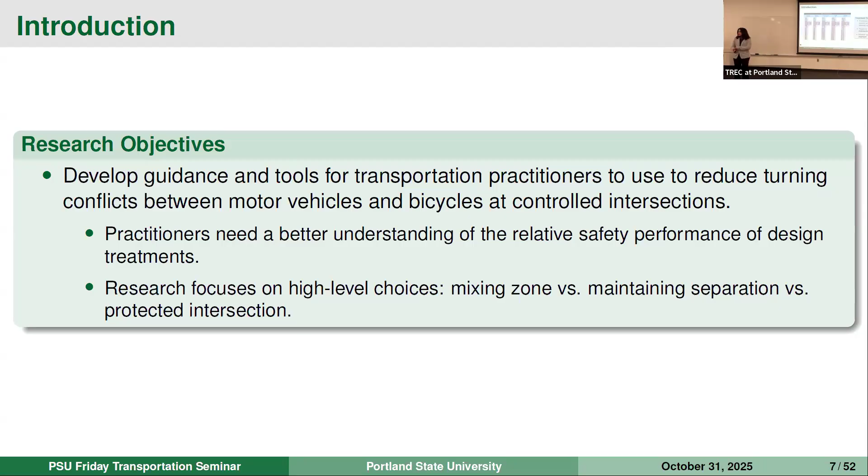The second treatment is the separated bike lane. The separation mainly occurs in the bikeway segment of the facility and may not always lead up to the intersection. The separation is generally through vertical elements like posts. Through the intersection itself, this treatment behaves very similar to the conventional bike lane, so the separation is mainly on the segment.

The third treatment type is the pocket keyhole bike lane. Here, bicyclists are shifted left—there's a lateral shift that takes place, and the bike lane is between the right turn lane for the motorist and the through lane for the motorist. The conflict area is upstream of the intersection, because this is where motorists are turning right to get into the right turn lane while bicyclists are shifting left to continue into the bike lane.

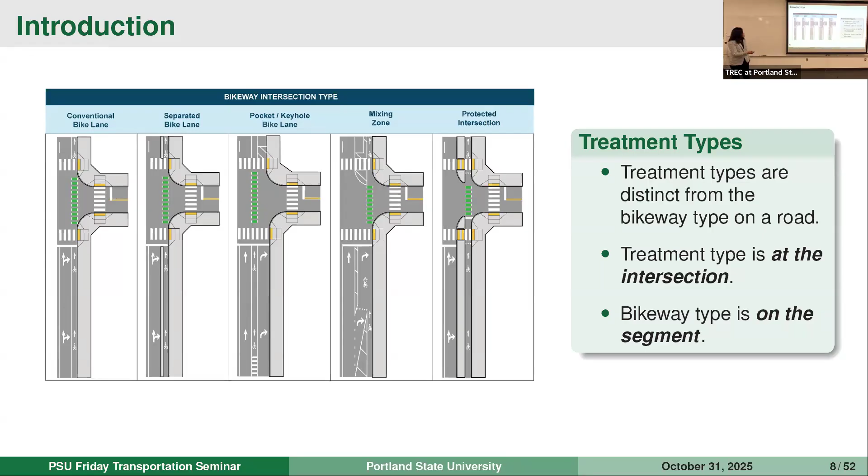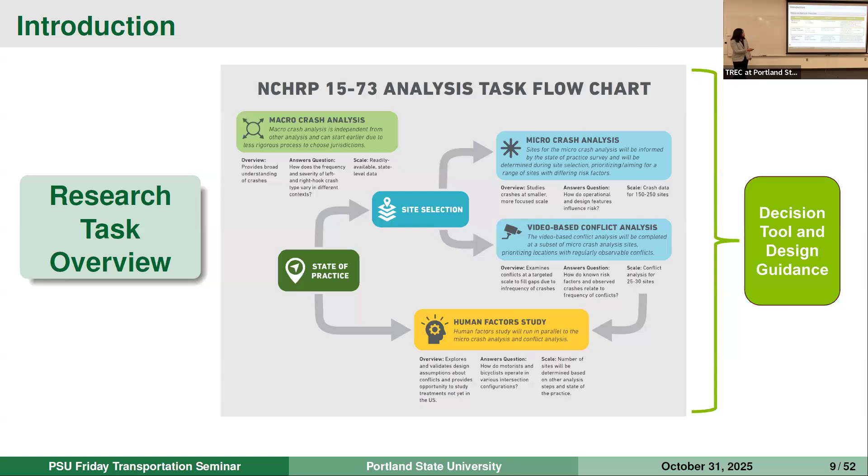Here's a quick overview of this mixed methods approach. This approach was undertaken because each of these experiments has some gaps, so by conducting these different experiments separately and then synthesizing the results together, we thought we could address those gaps with each of the methods.

As I mentioned, we first conducted a macro crash analysis, looking at crash data from the entire state. We looked at 3 states—Texas, Minnesota, and Washington—and then looked at aggregate bicycle safety, trying to understand the factors that affect safety.

From that, we were able to select some sites for the micro crash analysis. We ended up with 573 sites, all of which have the bike facilities of interest that I just talked about. We had 233 crashes that we evaluated at these locations.

The strength of the micro crash analysis, and crash analysis in general, is that it is a direct measure of safety. But the disadvantages are that it tends to be reactive, because crash data is available after a year or two, and we also have limited information about the crashes themselves, with variations in the crash reporting databases.

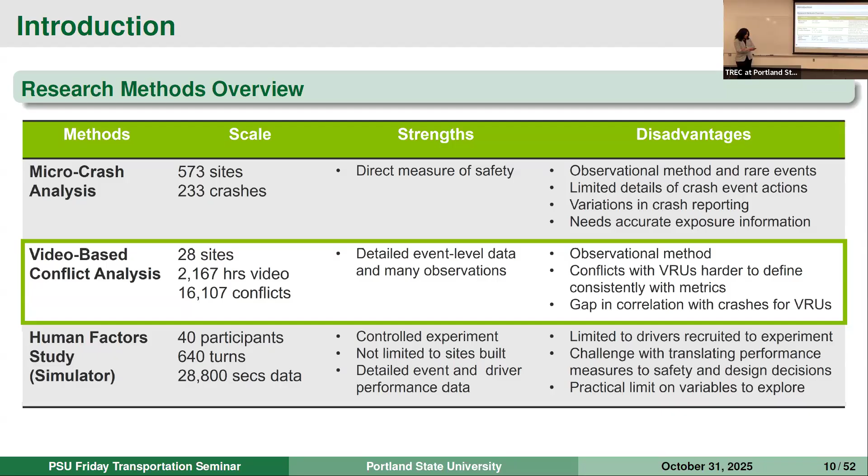Moving on to site selection, as I mentioned, we looked at the macro crash analysis and primarily looked at facilities with primary or secondary classifications, as defined in OpenStreetMaps. The macro crash analysis showed us there were a number of bicycle crashes also occurring at the intersection of these primary and secondary facilities with tertiary facilities—tertiary facilities being your local and collector streets.

So we added those back in and looked specifically at intersections to select locations with a bikeway or treatment of interest that was signalized. From that, we selected our micro crash analysis sites and also our sites for the video conflict analysis. In the interest of time today, we'll primarily focus on the video conflict analysis, which Jason will talk about in a few minutes.

For that, we wanted the sites to be as geographically dispersed as possible—we didn't want to just select sites from one city or area, since we want to understand how these treatments perform everywhere. We aimed to select 5 to 6 locations per treatment type, with a mix of traffic volumes and intensities. We also looked at feasible camera mounting locations to make sure sites had the necessary infrastructure, and that they had adequate bicycle volumes, since we're studying conflicts and need enough volume to study that.

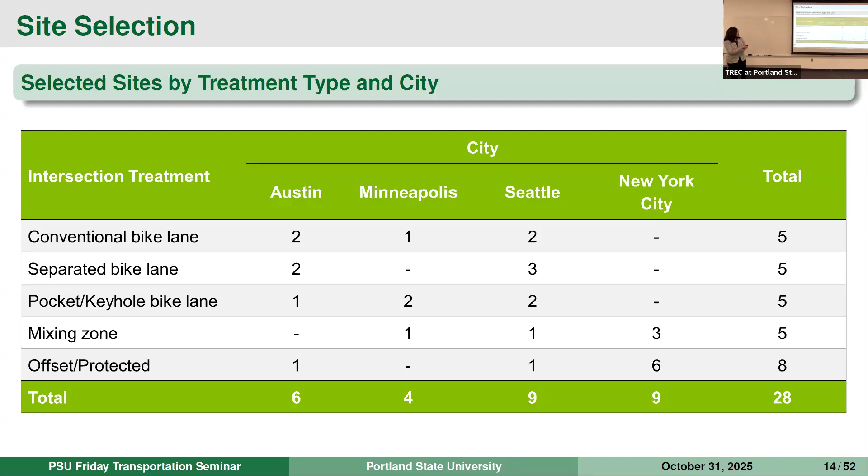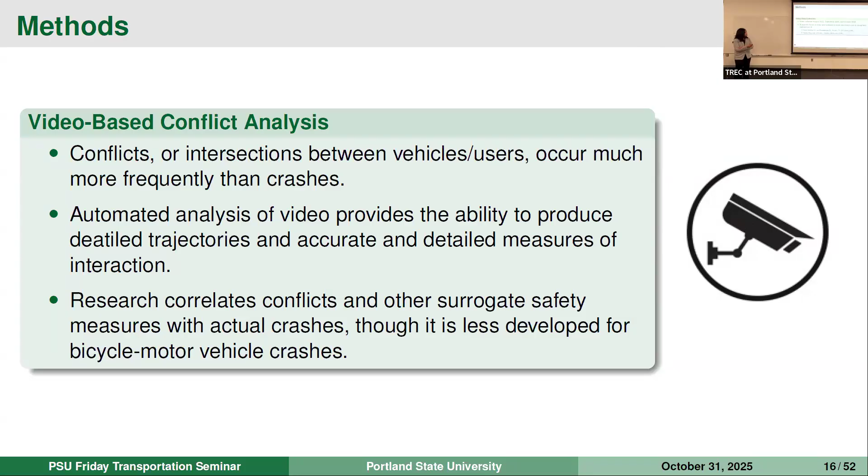A little bit about the methods—as I said, we'll focus on the video-based conflict analysis today. We contracted with a vendor to collect the video data, and then with another vendor to perform an automated analysis of it. This analysis gave us the ability to look at detailed trajectories and other information. The video data was collected over 3 months, between August and October of 2022.

We made an effort to collect at least 60 hours of data at each location. There were a couple of exceptions where we didn't quite meet that threshold, due to equipment malfunction.

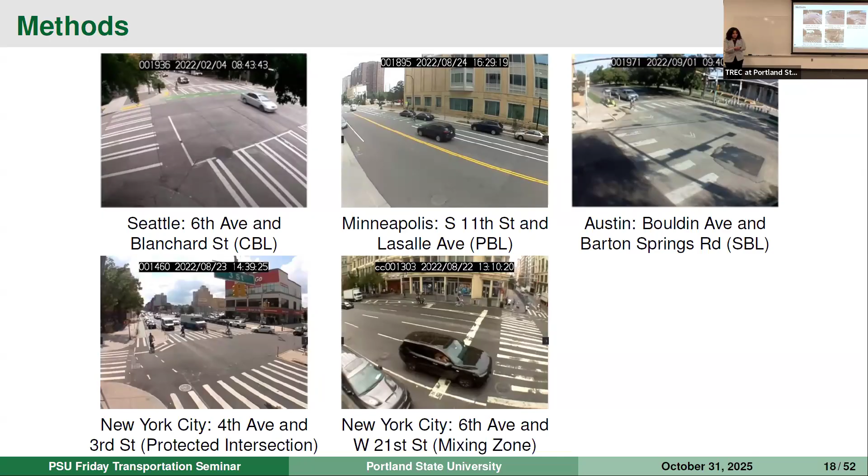Here is the information we got from the automated analysis. We were able to get trajectories for each road user that was extracted from the camera.

In addition to these trajectories, we also were able to know what type of road user was arriving at that conflict area. So we drew the conflict area we were interested in, which user arrived first. We also know what the median and conflict speed of the two users were, the type of conflict, and observed PET.

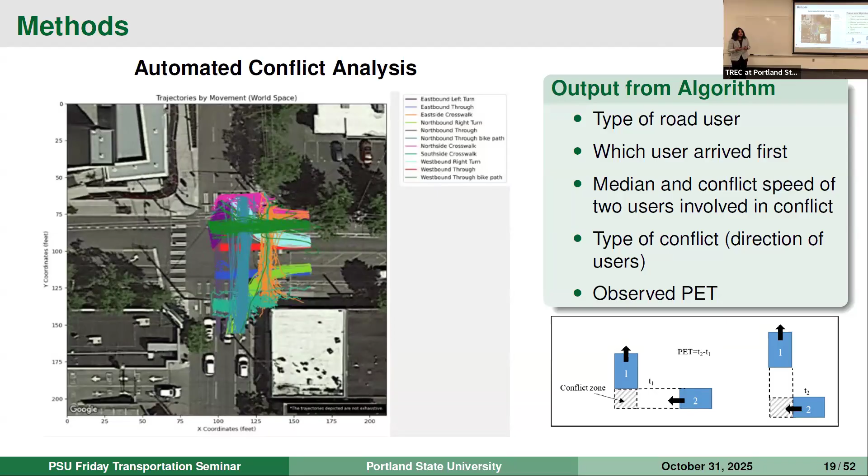PET stands for post-encroachment time. It is a surrogate safety measure that essentially refers to the time difference between when the first user leaves the conflict area and the second user enters that conflict area. So it's essentially telling you how close the two users are in time and space.

Okay, with that, I'm just going to pass it over to Jason to talk about the data and methods. Thanks, Sirisha. So the first thing we had to do when we received the data from the third-party vendor was some data massaging, data cleaning, and data preparation.

We originally got data that included all PETs less than 10 seconds. We filtered that to represent PET of less than or equal to 5 seconds. Sirisha mentioned there wasn't much consistency with certain thresholds. A recent study summarized about 12 different studies and established with some confidence that 5 seconds is a good threshold, representing some level of severity of conflict between motor vehicles and vulnerable road users.

After filtering, we looked at some different removals as well. Any violation, so if the facility wasn't being used correctly by the cyclist or motorist, any pedestrian-vehicle conflicts or unknown vulnerable road user conflicts were removed. Any bicycle-to-bicycle conflict was removed, and then any erroneous speed was removed as well.

We had a couple of speeds in there that were in the 180 to 190 mile per hour range for both the motor vehicle and the cyclist, completely unrealistic for these types of intersections. Lastly, we removed any duplicates. The number of duplicates is almost the exact same as the number of observations remaining for analysis. We suspect that when we extracted and downloaded the data, the observations were simply duplicated.

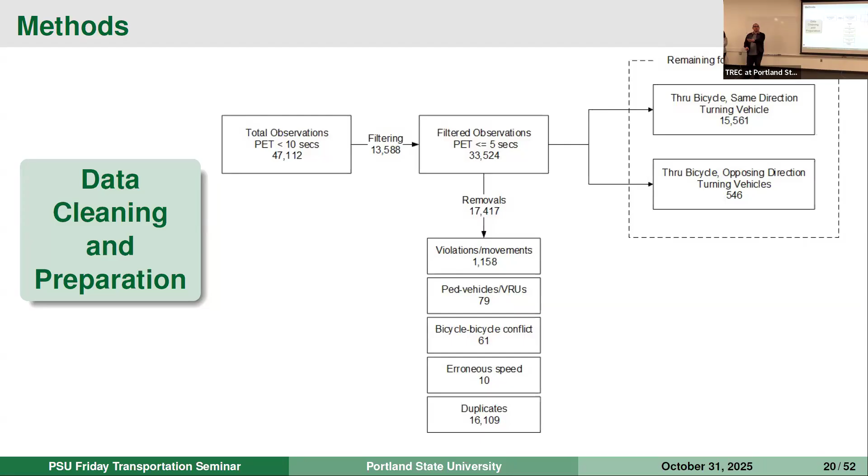In the end, that gave us about 15,600 observations representing through bicycle movements with vehicles turning in the same direction, those right hook movements. And then about 550 observations in which the bicycle was having a through movement and the vehicle was turning from the opposing direction, those left turn movements.

Next, we needed to define our conflict threshold and severity threshold. In general, lower PET values indicate a more severe conflict, meaning the interaction between cyclist and motor vehicle is closer. However, PET alone may not be sufficient to describe a conflict in full detail, so we can further inform that interaction by considering vehicle speed at the time of conflict, which fortunately was provided by the third-party vendor.

So we first defined our PET thresholds based on well-known and established values. Less than or equal to 1.5 seconds is a high severity conflict. 1.5 to 3.5 seconds is a medium severity conflict. And 3.5 to 5 seconds is a low severity conflict.

In addition, we empirically looked at what the speeds were at the time of conflict. We used median speed and compared that to other studies done across the country at different locations and facility types, like unsignalized intersections and mid-block crossings, to understand the speed threshold used. Pretty consistently it was in the 9 to 10 mile per hour range, which matched our empirical values as well.

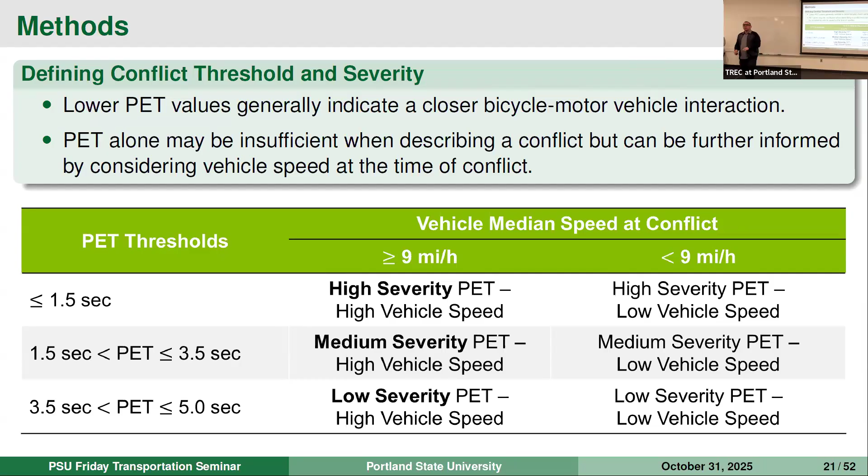So our speed threshold to determine high speed or low speed was 9 miles per hour. What we're going to focus on primarily today are the high severity conflicts associated with high vehicle speed at the point of conflict, particularly for the modeling, which we'll talk about a little bit later.

So for the results, I want to paint sort of a wide brush over the results, and then Sirisha will jump back in and conclude what the key findings are and how they can be used in the design tool.

So here is an overview of the total number of conflicts. Note that these are all conflicts less than 5 seconds, not high severity conflicts. I'm sure most of you are immediately noticing the very large values corresponding to New York City, particularly for our mixing zone and protected intersection treatment types.

This was something we had to deal with, and in the modeling we accounted for this through certain techniques. There's just an overrepresentation - there's more folks, more people, more bicycle volume. Overall, there's more conflicts in New York City.

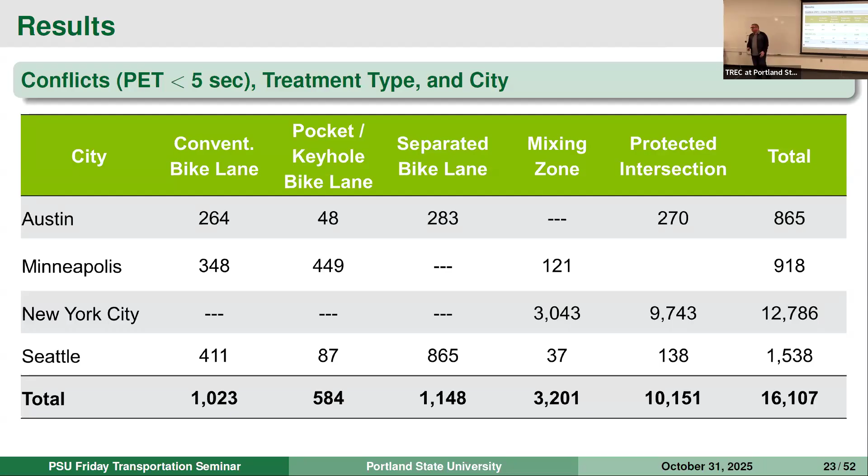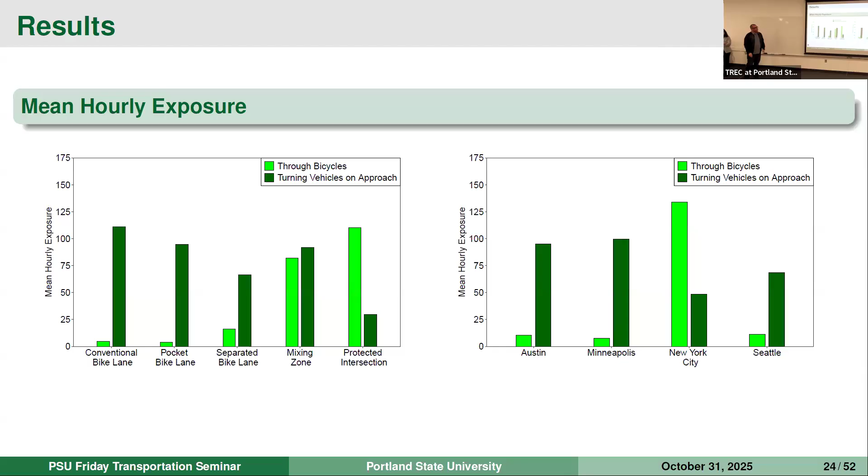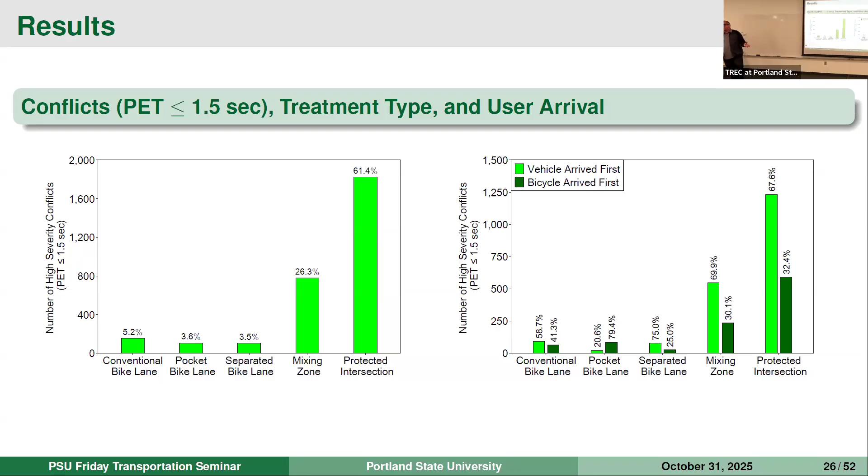What happens if we look now only at high severity conflicts, those PETs less than or equal to 1.5 seconds? We wouldn't expect much difference here, simply because of the overrepresentation of observations in New York City, hence mixing zone and protected intersections. But we do see different behavior in terms of vehicle versus bicycle arriving first - it's almost the opposite for the 3 treatment types that aren't mixing zone and protected intersections. Now the vehicle arrived first for a couple of those, and the split is much larger than what we looked at for all conflicts less than 5 seconds. This is true for all treatment types.

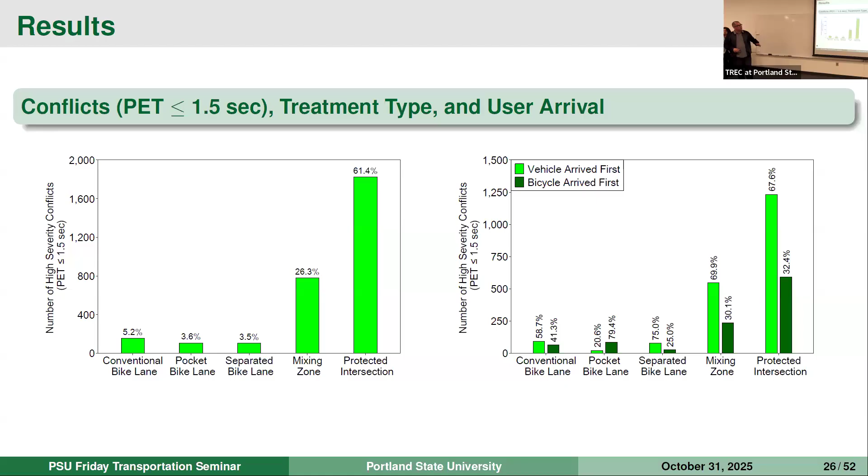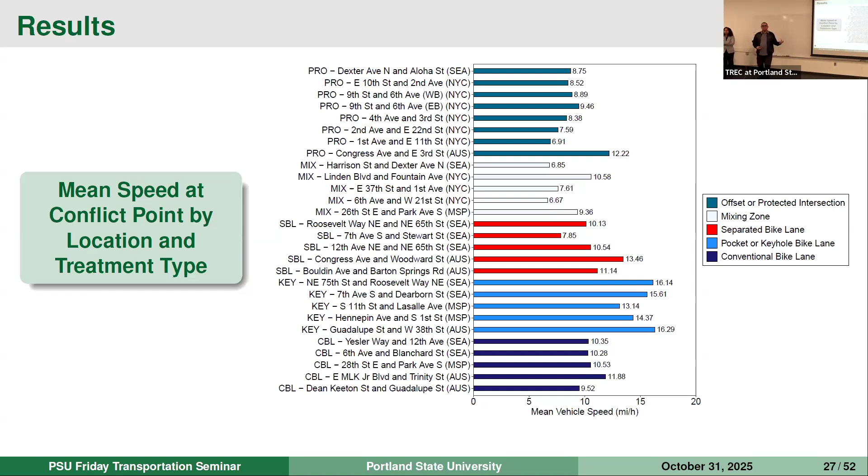Next, we assessed the mean speed at conflict point by location and treatment type. There's a lot going on here, so I want to point out 3 things. First, the pocket or keyhole bike lane - we denote 3 letters representing protected intersection, mixing zone, separated bike lane, and so forth. The keyhole or pocket bike lane has the highest mean speed across its locations at the point of conflict. If we go to protected intersection and mixing zones, with the exception of an outlier in Austin, these 2 treatment types have the lowest average speed at point of conflict. We're starting to see a trend in terms of which treatments may be preferred versus those with lower safety performance.

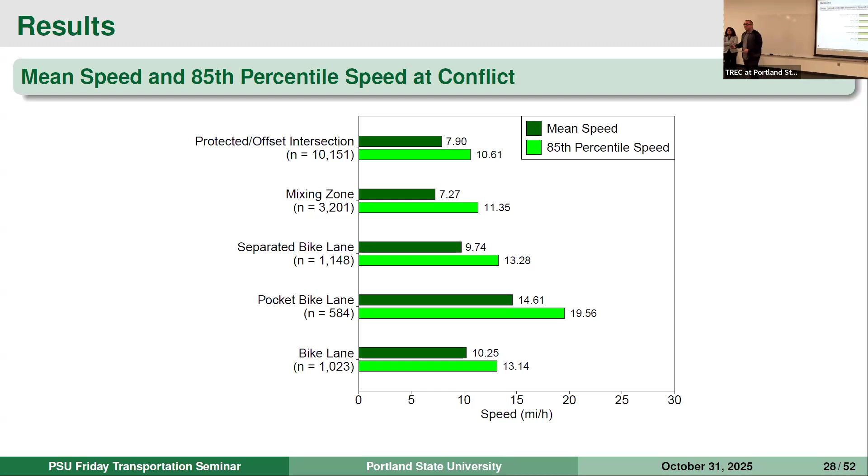We also looked at overall mean speed per treatment type, not at the site level, as well as 85th percentile speed at the point of conflict. Again, the same trends: the pocket bike lane has, by a decent amount, the highest average speed at the point of conflict, as well as the highest 85th percentile speed, while protected intersections and mixing zones have the lowest average speed and lowest 85th percentile speed at the point of conflict.

This plot I particularly like. It shows different severities of PET by the red circles, blue triangles, and green squares. What we would expect to see is this funneling effect - fewer high severity conflicts, more medium severity conflicts, and the most conflicts being low severity. That's the behavior we observe mostly across these treatment types. We can also see how many more observations we had for mixing zones and protected intersections due to those locations being in New York. This also shows how few observations, relative to other treatment types, we had for pocket bike lanes.

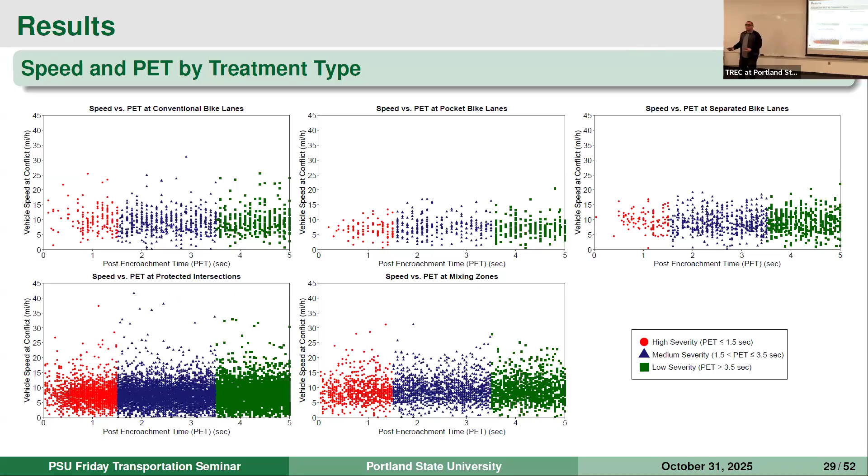This plot also presents some pretty good information that sticks right out at you in terms of the proportions. It's more viewable on the computer screen and less viewable on the overhead projector, so apologies for that. But what we see here are these large proportions of high severity.

This is now including speed, so PET less than 1.5 seconds and vehicle speed at the point of conflict greater than 9 miles per hour. We see much larger proportions in pocket bike lanes and conventional bike lanes compared to the other 3 treatment types. That trend continues across severity all the way to the least severe, where we see much higher proportions of the lowest severity conflicts, meaning PET greater than 3.5 seconds and low vehicle speed.

We're seeing those at the protected intersection, mixing zones, and separated bike lane. So these descriptive statistics are starting to tell us a story about which treatments may have better safety performance versus those that do not.

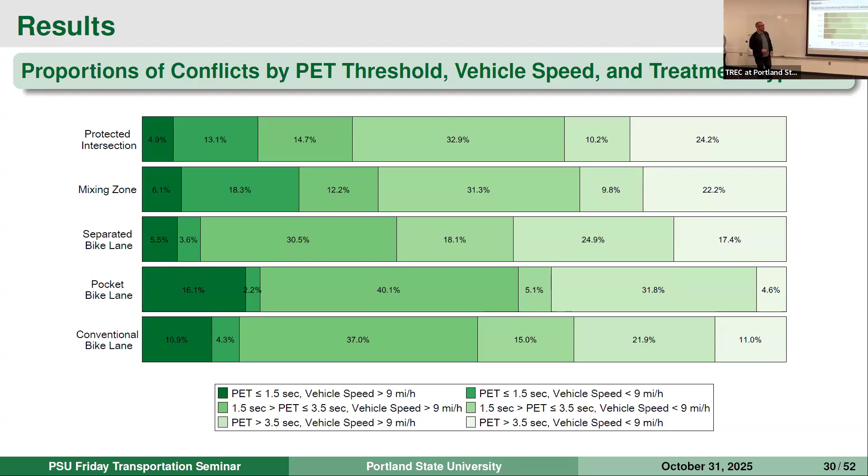But that's just a descriptive analysis. To take this a step further, we wanted to model conflict frequency and conflict severity. For conflict frequency, we considered only high severity conflicts, meaning PET less than or equal to 1.5 seconds as well as vehicle speed greater than 9 miles per hour.

For conflict severity, we considered different ranges of PET in conjunction with vehicle speed greater than 9 miles per hour. The premise here is to understand the different behaviors at the different sites for conflict frequency as well as conflict severity.

For conflict frequency, this is something we can use similar to a safety performance function - think conflict performance function. We can use that to estimate the expected number of conflicts for a given treatment type, so we can use it in safety investigation or screening processes.

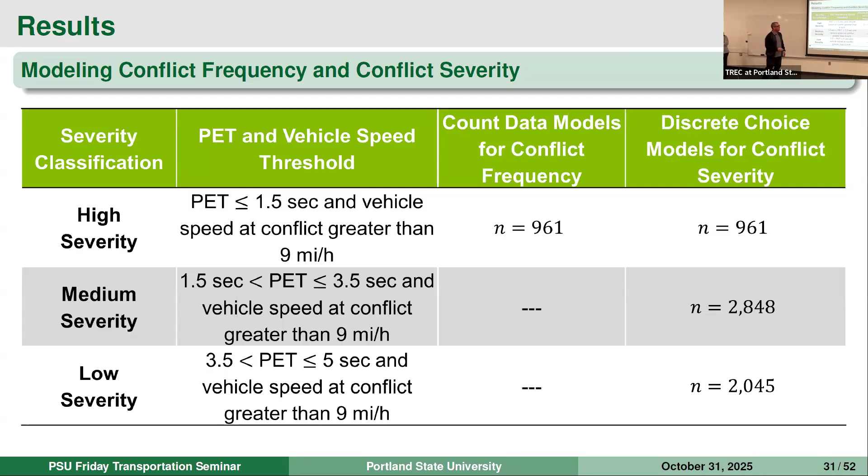You heard me say that we did a various number of models for each treatment type. The idea was our assumption that the behavior of conflicts at those different treatment types was going to be different. So instead of including everything in a single model with treatment type indicators, we created 5 different models, one for each treatment type, and then conducted a transferability test. The transferability test indicated that we indeed should have separate models for each treatment type.

I'm not going to go too far down the modeling rabbit hole, but if that's a conversation you'd like to have, or you're online, feel free to ask those questions or reach out, or we can chat after today's presentation.

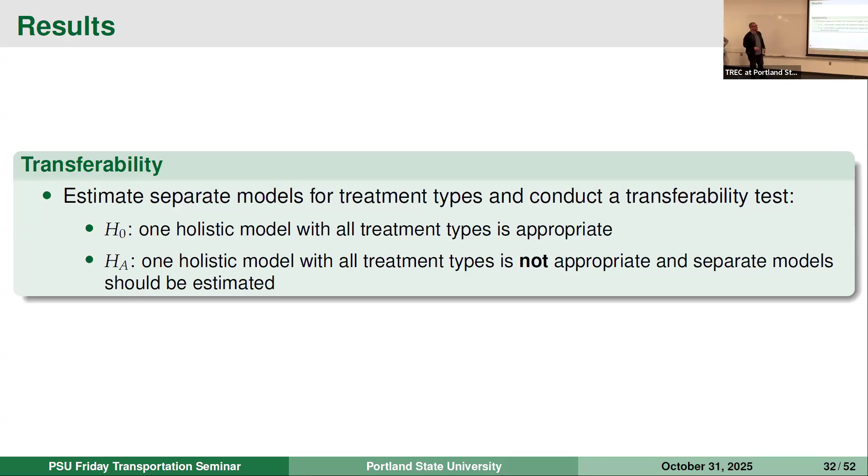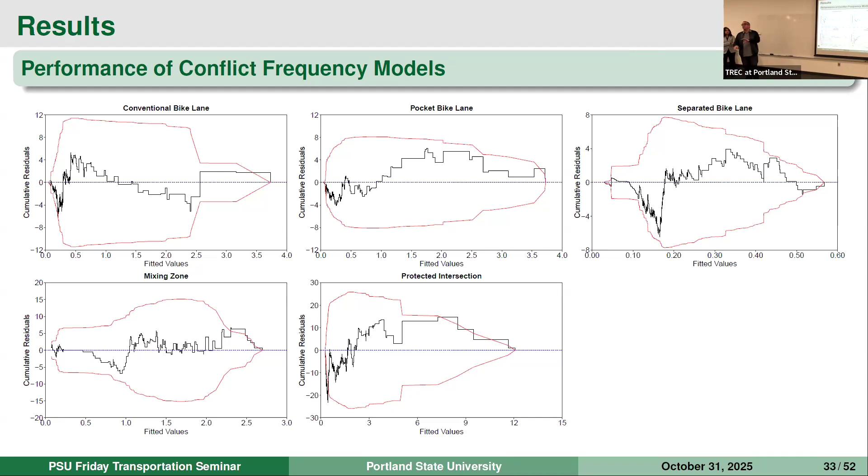We have this black line, called the cumulative residual line, and we want that to oscillate about 0 and stay within those red lines, representing the 95th percent confidence interval. You see that's essentially the behavior we're seeing, with a few exceptions at those higher values. This tells us, just by looking at this, that the conflict performance functions are performing pretty well across all ranges of conflicts.

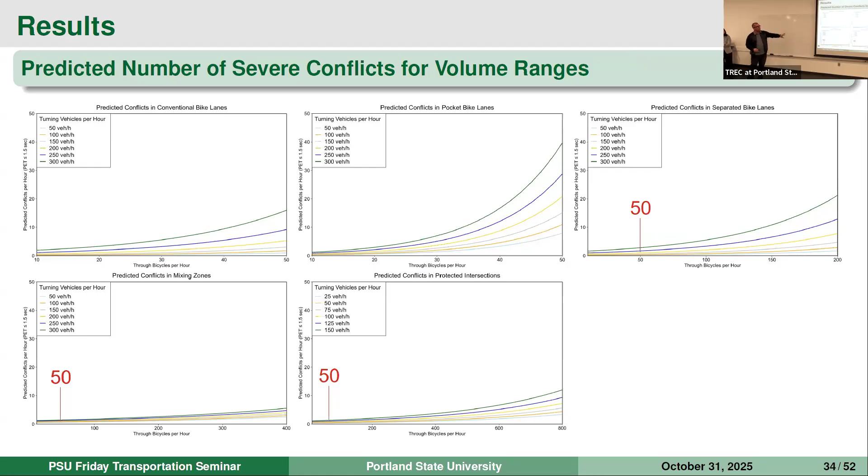So let's take a look simply at 50 bicycles per hour with these different turning movement vehicles per hour. We can immediately see that based on our conflict performance functions, the worst performing treatment type in terms of safety, conflict frequency, is the pocket bike lane, followed by the conventional bike lane.

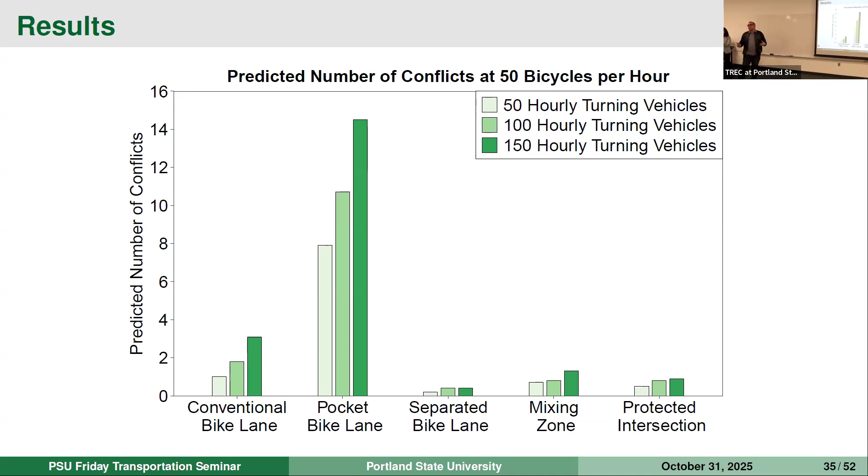And we can extend this to look at different varying turning volumes, different numbers of bicycles per hour, depending on what the need of the site or the need of the safety investigation is.

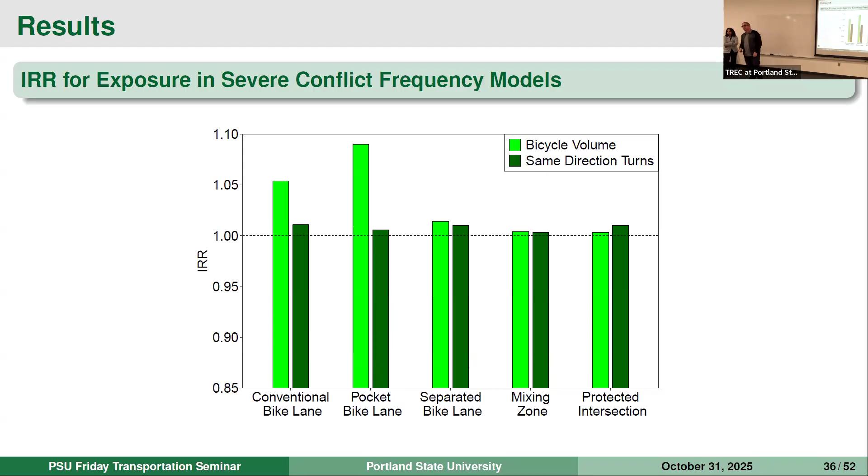This plot shows how much of a contributor exposure is to explaining conflict frequency, in terms of predicting the expected number of conflicts. As we can see, the further the green line for bicycle volume is from the horizontal line, the higher the effect that exposure characteristic has on explaining conflict frequency.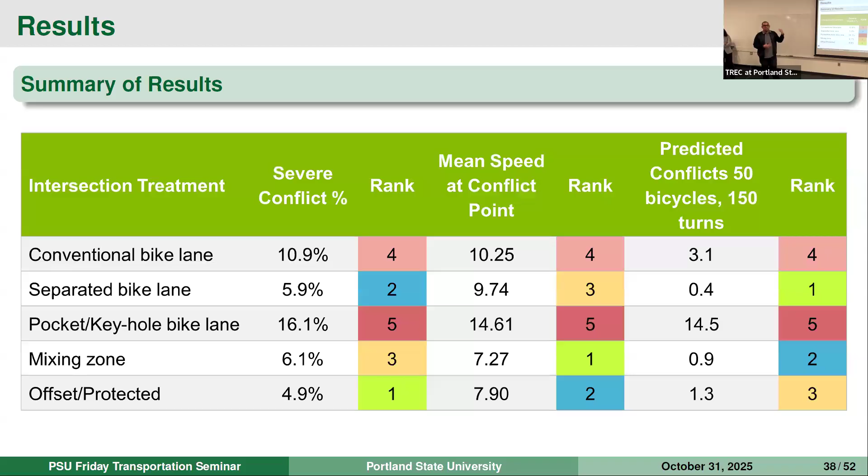Before I pass it back to Sirisha, what are some other key results? I've touched on a couple already: bicycle volume is a more important contributing factor to conventional bike lane conflict frequency, as well as pocket bike lane conflict frequency. Some sites, although not shown here, using site level indicators, were significant in explaining both frequency and severity. We can chat about that.

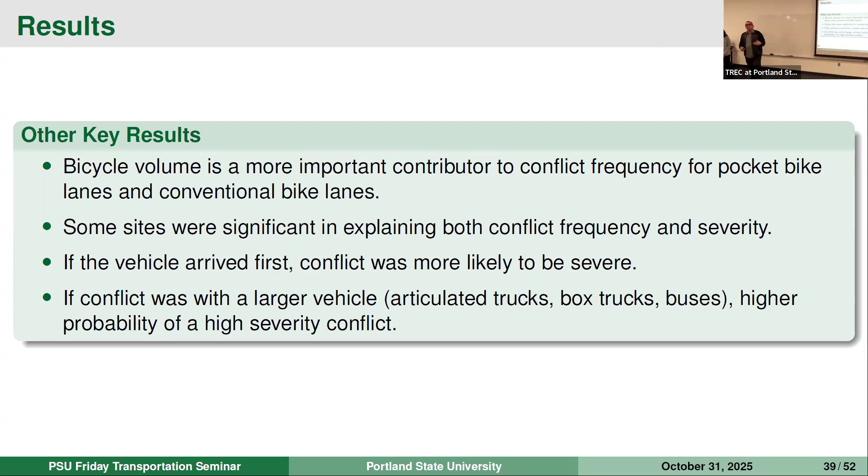It's also in the report, and we provide links at the end of today's presentation. If the vehicle arrived first, the conflict was more likely to be severe. And finally, if the conflict was with a larger vehicle — an articulated truck, a box truck, or a bus — there was a higher probability of a high severity conflict.

So that wraps it up for my section. I'm going to pass it back to Sirisha to talk about the conclusions and recommendations and finish up with the decision tool. Thanks, Jason. Okay, so what does this all mean?

As I said before, we just talked about the conflict analysis today, but we had two other experiments we also looked at: the crash analysis as well as the simulator work. Bringing all those results together, we were able to provide some conclusions and recommendations for practitioners to consider.

First, with protected intersections, we recommend it for any location where space can be reallocated to provide a protected intersection. We did see crash rates in the middle for these three cities, with the lowest crash rate in New York City. This was where we saw a lot of conflicts, as Jason mentioned, but when you control for exposure, the crash rate is low. There's a similar number of conflicts as the mixing zone, and we also have the second lowest mean speed at the conflict point.

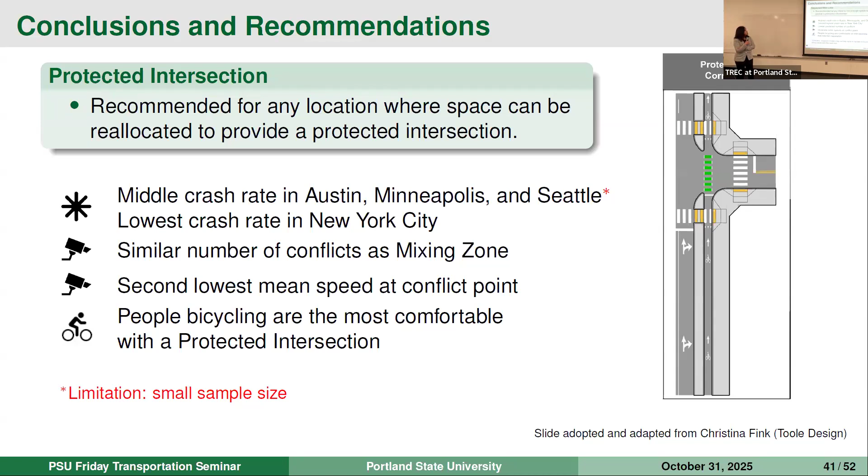Research done by others has consistently shown, with protected intersections and separated bike lanes, that people feel most comfortable biking when there is separation. So these were the findings there. In terms of the separated bike lane, we recommend it where there is not enough space to provide a protected intersection.

We did see higher crash rates in Austin, Minneapolis, and Seattle, and second highest crash rate in New York City. The issue we think we're seeing is that we used exposure models in at least three cities to estimate volumes, but we think those models are not sensitive enough to capture the effects of these new facilities in terms of increased ridership. So we think that may be causing the higher crash rate.

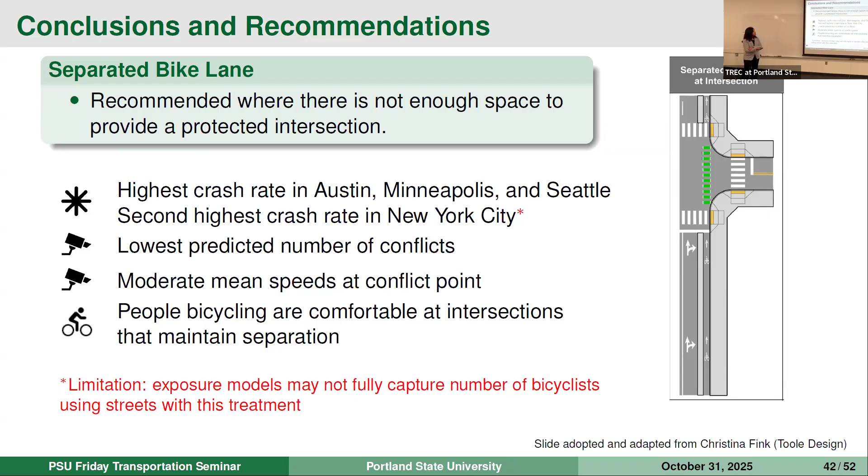We did see the lowest number of predicted conflicts in our conflict analysis, and speeds were sort of in the middle. Again, research from others has pointed to people stating they're more comfortable biking at intersections that maintain this separation. For the mixing zone, we recommend this feature be provided only where right turn volumes are high, but there is not enough space to provide a separated bike lane at that intersection.

From the data analysis, we did see low crash rates and the lowest predicted number of severe conflicts. People are generally managing their interactions quite well, and we also saw the lowest mean speed at the conflict point. But again, from the literature, we see people are not comfortable in these sorts of facilities when they have to share space with motor vehicles.

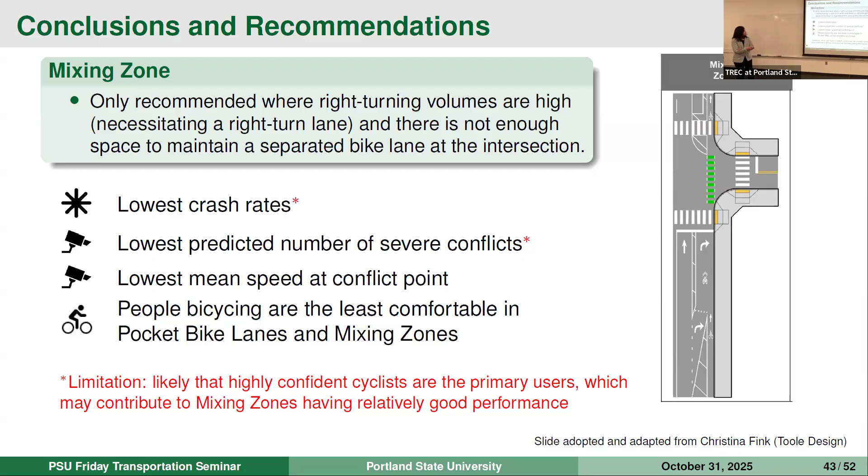The pocket bike lane - you saw the findings that Jason just presented. This is recommended in very limited situations; we recommend a mixing zone over a pocket bike lane in most situations. We did see the second lowest crash rate for this design and lower predicted number of conflicts, but we did see high vehicle speeds at the conflict point, so that gives us pause. People are also stating they're not comfortable in these types of facilities where they have to merge and move laterally to the left.

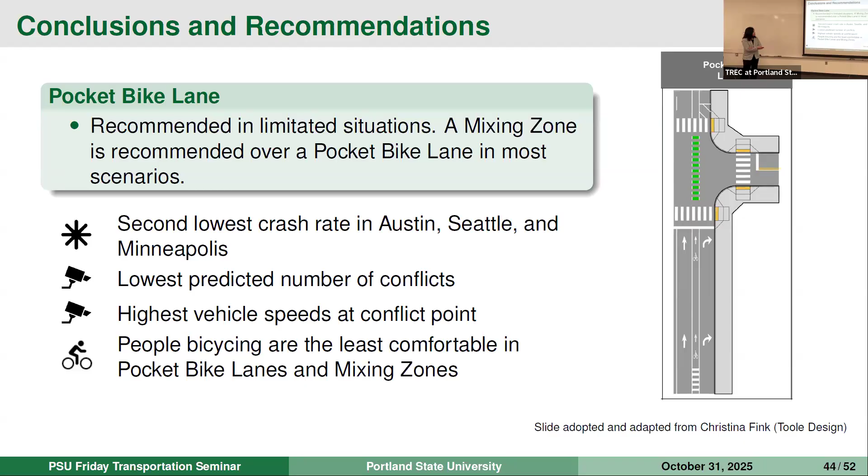So this is just reiterating the summary of the things I just talked about. And how does this all come together? Remember, our objective was to provide guidance for practitioners and a tool that'll help them decide which intersection treatment they need to use. So the input to this tool - this is the flowchart right here.

The input to this tool is hourly right-turning motor vehicle volumes and existing or anticipated hourly bicycle volumes. Having these two pieces of information, you can work your way through the tool and figure out the recommendation for the type of design treatment you should use at intersections. Again, this is just for the intersection.

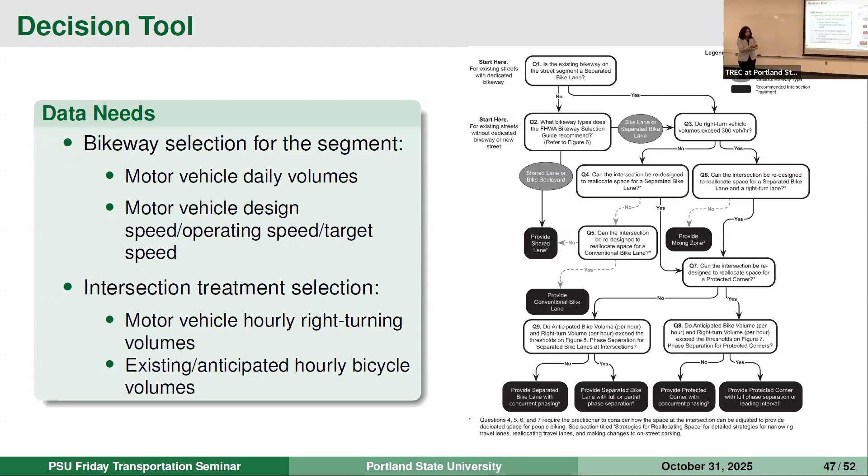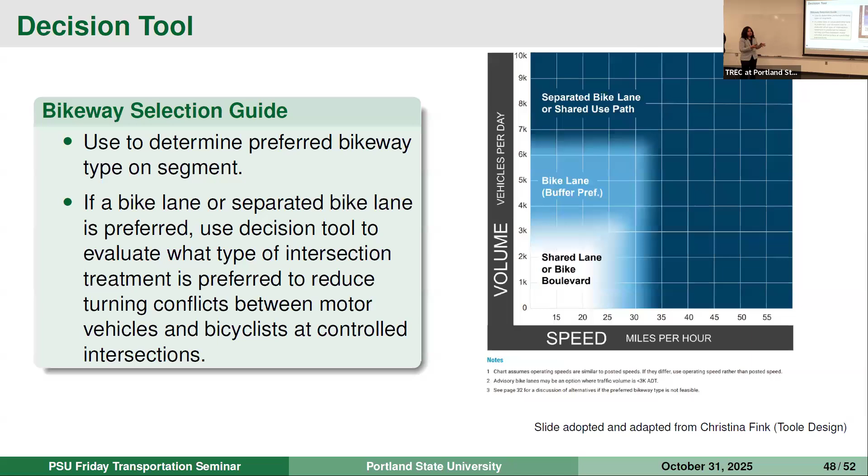For the bikeway portion or segment portion of the bikeway, there are other tools like the FHWA's Bikeway Selection Guide, and more recently the AASHTO Bike Guide is also out. These can provide information about what sort of bikeway you should use leading up to the intersection. But then the decision tool we developed should be used at the intersection to figure out what treatment should be used.

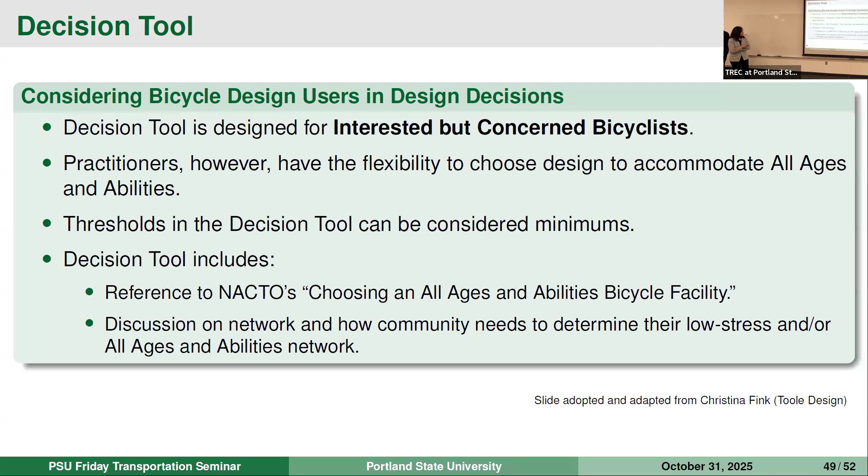This decision tool is designed for the interested but concerned bicyclist. But practitioners always have the flexibility of choosing the design they want - you can choose a different design depending on local context and your judgment. The thresholds we developed in this tool can be considered minimum, so you can go above and beyond what is recommended here to choose the particular treatment you want.

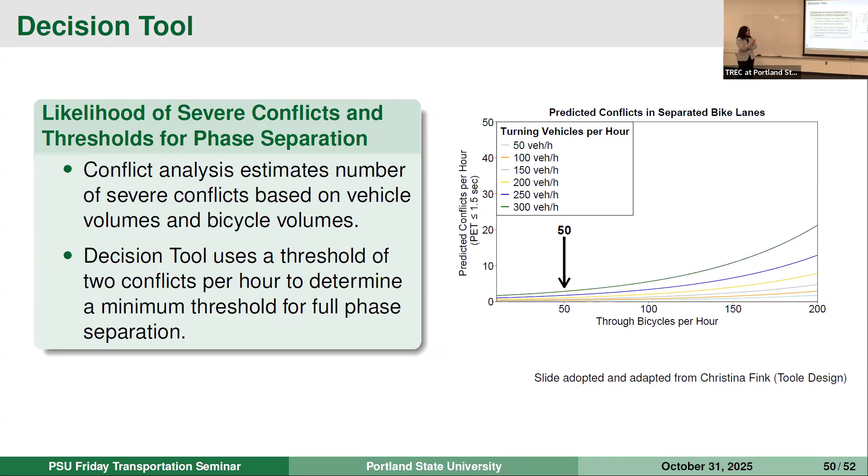So this chart should be familiar - Jason just showed this. This is the conflict performance functions, and this was used in developing that decision tool. And that's how the tool was developed.

So what this research also provided is revised thresholds for phase separation. Previous research from AASHTO was that the threshold is 150 vehicles per hour, and that's where you do the full phase separation, signalizing different phases for bicyclists and motor vehicles. But based on this research, we were able to provide more precise thresholds of when you would need to consider different sorts of treatments at the intersection.